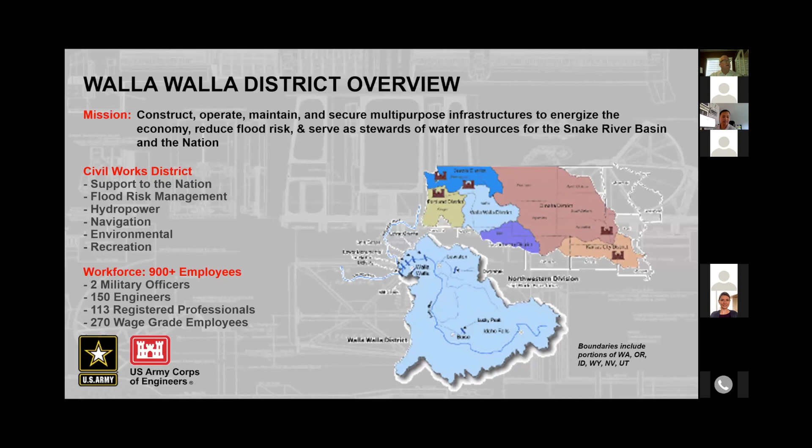That's kind of a quick picture of where we are. So when I talk to different people, they ask, okay, what do we cover? It's really not particular political boundaries or anything like that - basically it's a watershed. So if you take a look all the way out to the right, you see it touching into Wyoming with the Jackson Hole area, and all the way downstream to McNary, Umatilla, Washington.

I'm sorry, that's Umatilla, as in Oregon. So we manage operations of three major river systems consisting of 94 miles on the Columbia, 140 miles on the Snake, and 2 miles on the Clearwater, which basically leads up to Dworshak. We operate and maintain 8 dams, 6 of which have multi-purpose hydro and navigation facilities, and 3 provide flood damage reduction reservoirs. We also have a federal levee system and recreation sites that we operate and maintain.

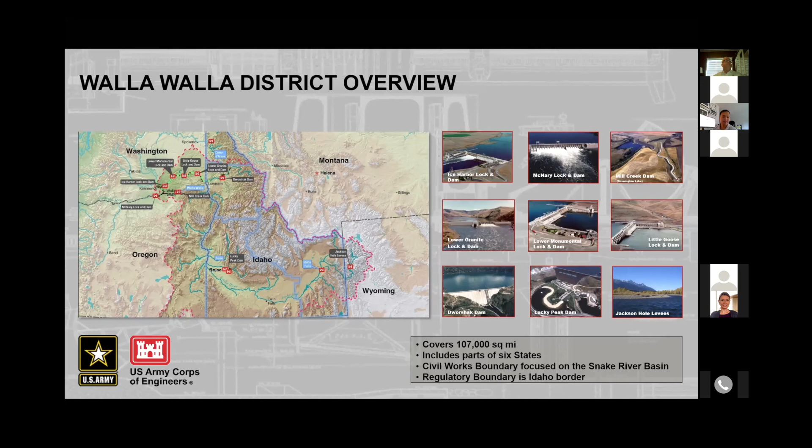Next slide. We operate a $50 to $65 million fish program annually. If you're from the local area in the Pacific Northwest, you're very familiar with what's going on with the fish in the Columbia River, in particular the Snake River systems. We're not going to dive too much into that, but we do place a lot of focus on it. Next slide.

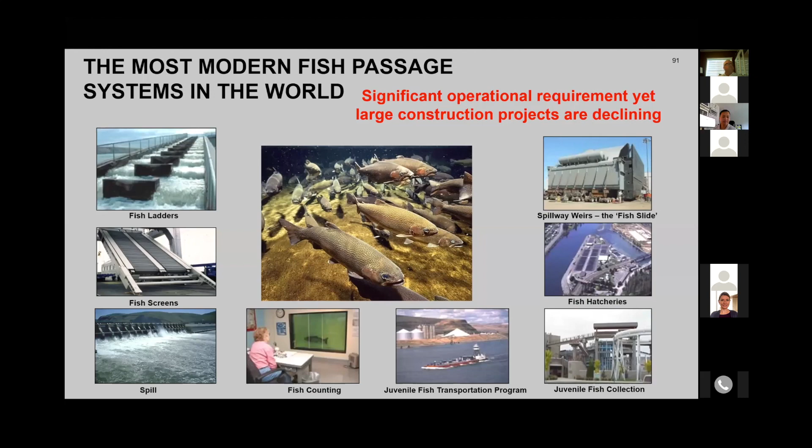Future anticipated funding constraints: we're looking at our O&M program, basically at the project level. The O&M project level is generally flat. Most of our funds come through the Bonneville Power Administration - about 50% of our appropriations are funding activities through that agency. The Columbia River Fish Mitigation Fund is expected to decline. We saw a surge of that in the last several years, and now that we're accomplishing those projects, those funds are tailing off quickly. Next slide.

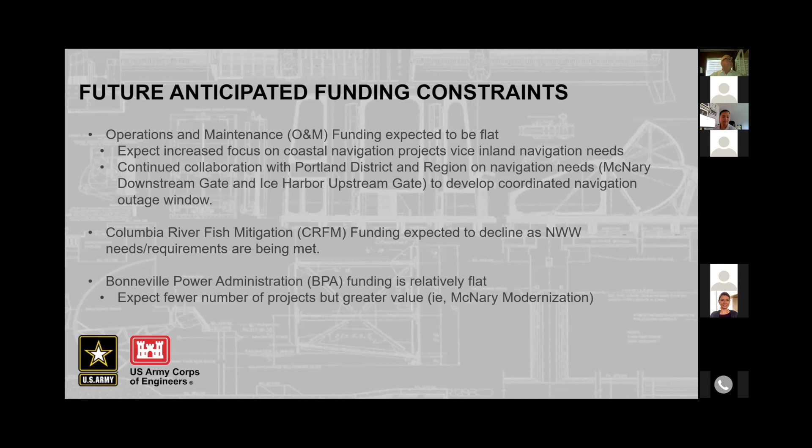Hydro trends: the big news here is really the McNary project that we have going on with the turbine replacement. Currently that's a long-term project over the course of about 10 or 12 years. The contract was awarded a year or two ago, and they're currently under design and basically prototyping the different projects in there.

Here's a big piece of that - we have a lot of upgrades that are going on, as you'll see in the slides later on. There's a lot of support equipment too that goes in with all these upgrades, in particular with McNary. So not just on the big projects - opportunities for primes, especially the turbines - but when we get into all the supplemental type pieces of it, you'll see that there are opportunities. Next slide, please.

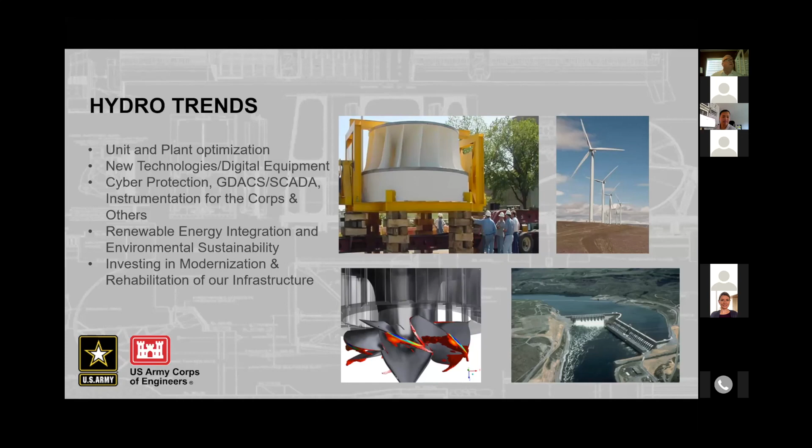Generator repair contract coming up - it's a MATOC, you'll see that on our listing as well. That's going to be issued out this year. A MATOC, of course, is a multiple award task order contract, and that'll be out throughout the region, throughout the Northwestern Division. We're going to have some general construction, a lot of crane work. Omaha District has put out a regional contract with crane, and they've basically maxed out the capacity on that, so we're in the process of putting up another one to satisfy demand. A&E support contracts - you'll see on the schedule those are coming up in FY22 to 23. Next slide.

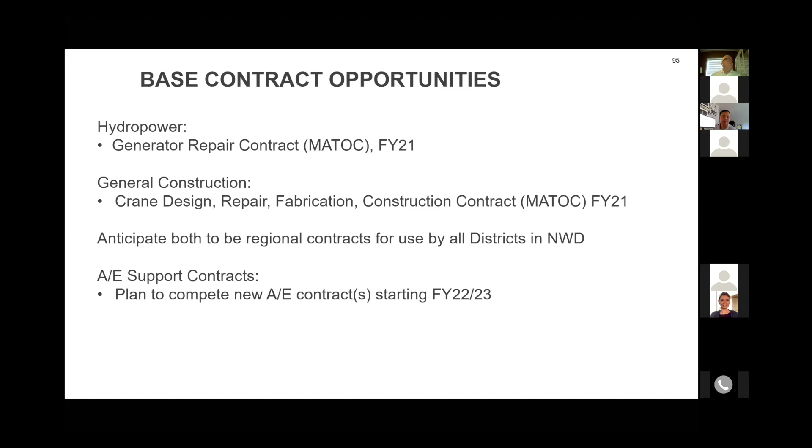Okay, this is where it's going to get speedy here. So the types of projects that you see here, in particular going onto the next facility with Granite, will be all very similar.

What I want you to take a look at is life safety, fire alarm systems. You're going to see this repeated on the other slides as well. These opportunities are all under the contracting opportunities sheet, a Microsoft Excel file. It provides much more detail and information on each project, and it's available on the Walla Walla District website, as previously mentioned. Next slide.

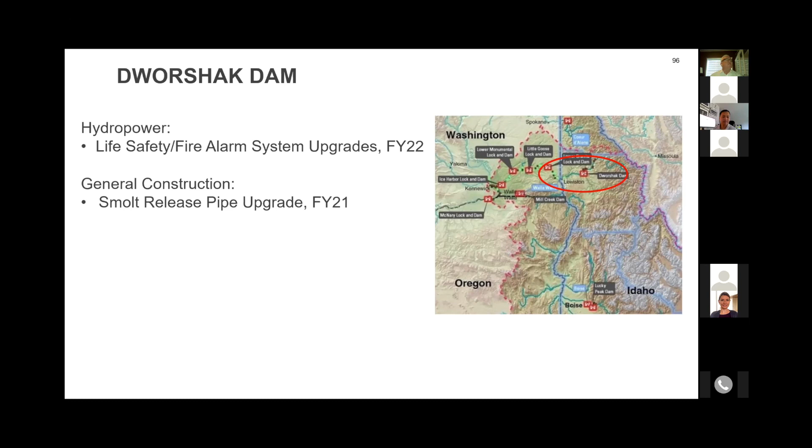Lower Granite. Talk about the blade sleeve upgrades, trash rack cranes, rack. We have another contract coming in for fabrication of these types of racks. The turbine maintenance platform, you'll see that in a couple of different places. And down for general construction, which we have very little of, but you get into basically an office type of deal down there in Clarkston.

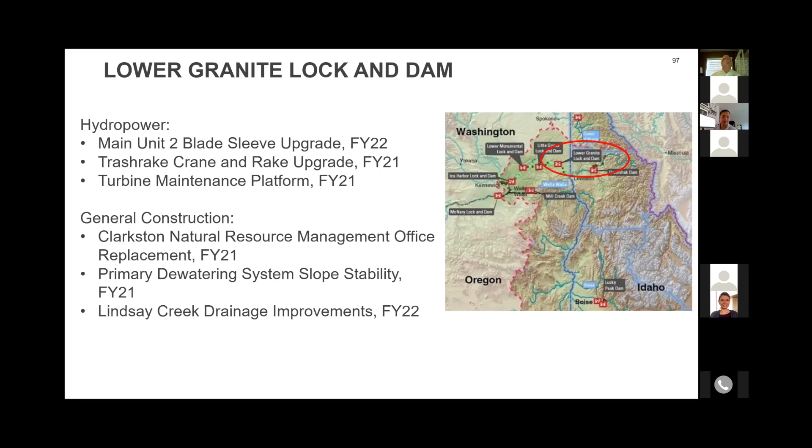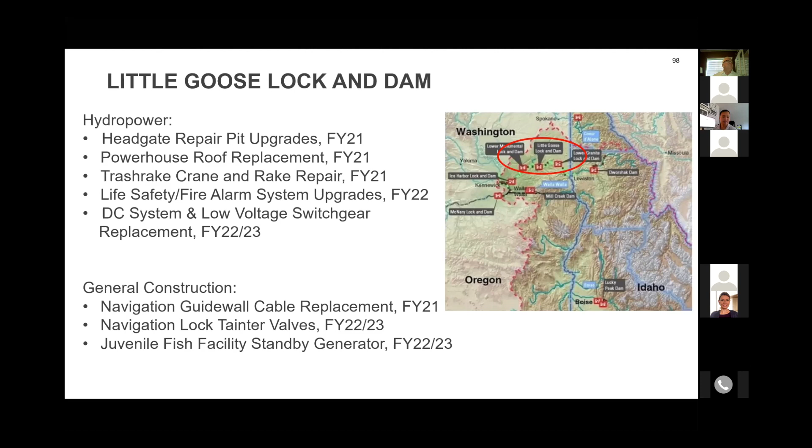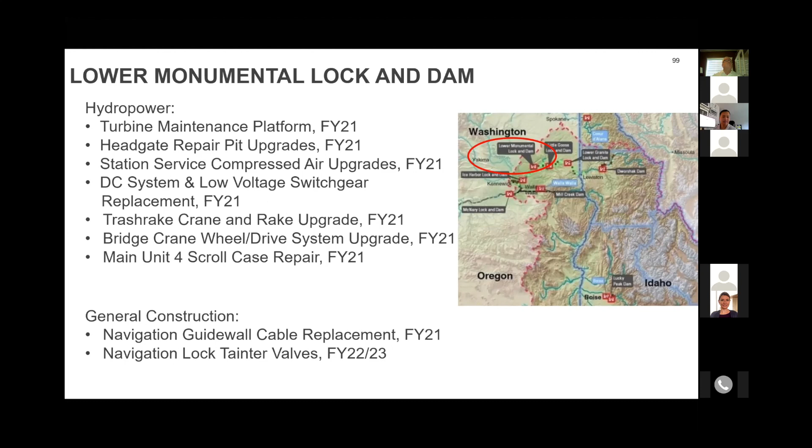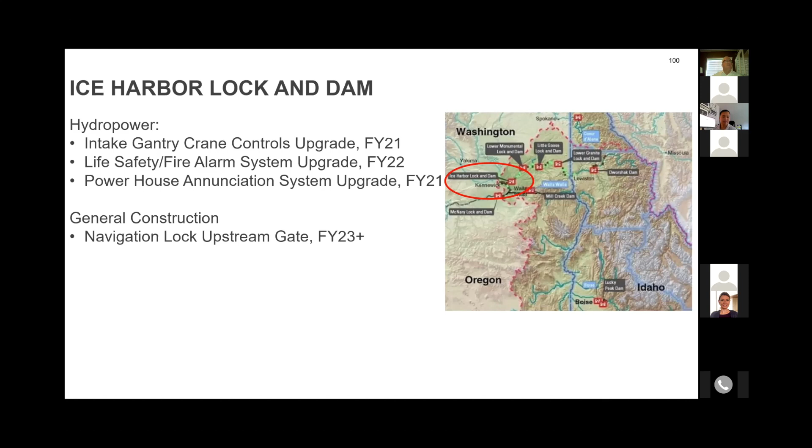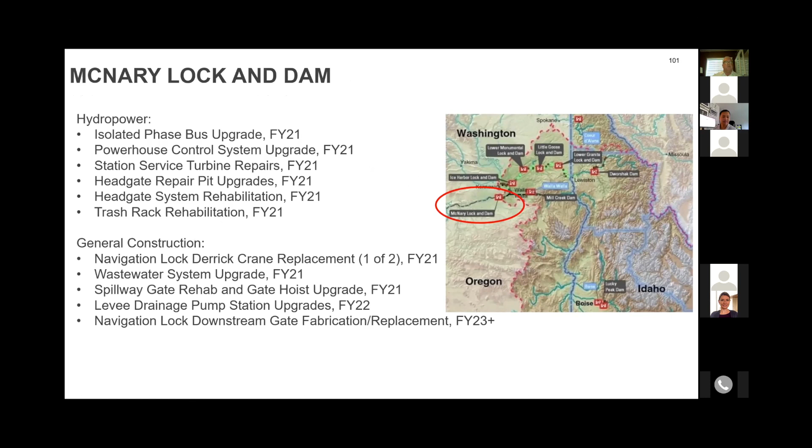Next slide for Ice Harbor. Again, you'll see gantry cranes, powerhouse, annunciations, navlock gates. These are all things that are consistent with each of these projects, typical across the board. This is where most of the money is being pushed into right now as far as this facility. Again, as you look through those, you'll see the different types of projects going on.

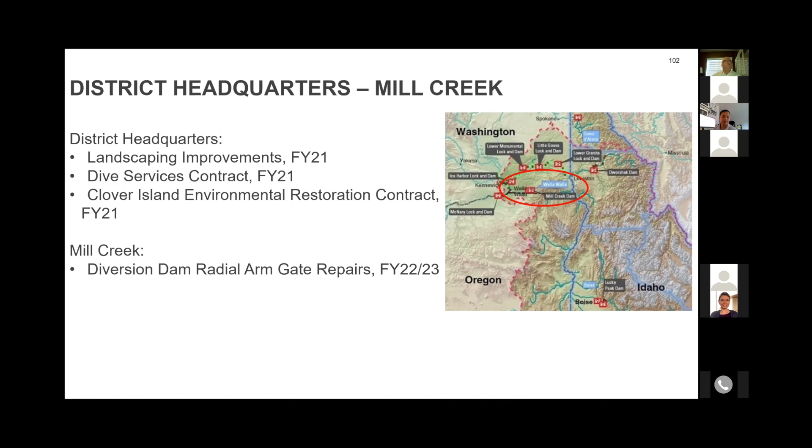As I transition to the last slide, I'll just say that, next slide please. There you go, thank you. Walla Walla is primarily a civil works district, and with that we don't do a lot of vertical, traditional type construction that you would think the Seattle, Kansas City, and Omaha districts have. Very similar in nature to the type of work that the Portland district has, being civil works.

So with that, I'd like to go ahead and transition with an introduction to my esteemed colleague, Carol McIntyre, who has been a great resource and a mentor to me from the Portland district. Carol, up to you.